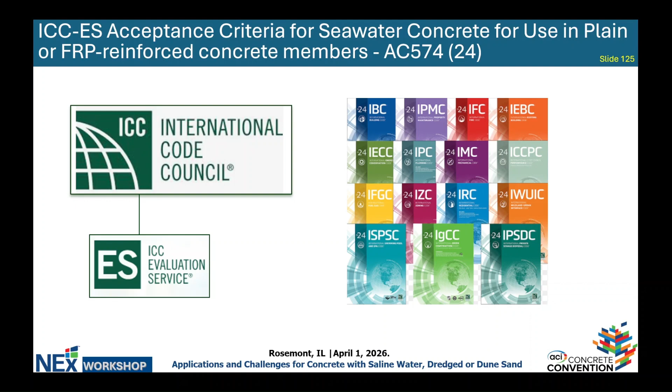So ICC-ES is actually a subsidiary of the International Code Council. The International Code Council does the IBC and the IRC. And in the IBC, there is section what was 104.11, but now in the 2024 IBC and later editions, it's 104.2.3. Doesn't roll off the tongue as well. But it is the section that allows you to use alternative materials, design, and methods of construction and equipment.

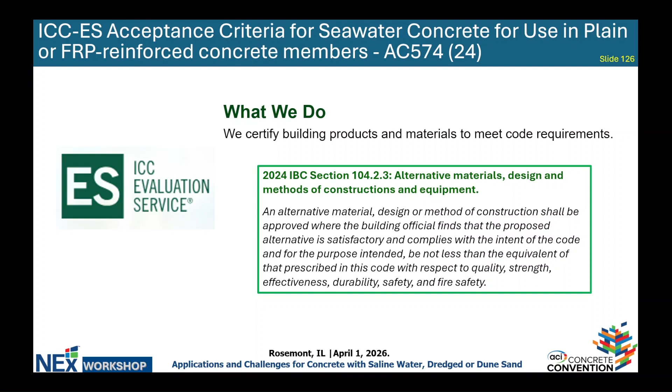And so our role at Evaluation Service at ES is that we certify these building products to ensure that they comply with the intent of the code and with respect to quality, strength, effectiveness, durability, safety, and fire safety. So since seawater concrete is not recognized in ACI 318, which is referenced by Chapter 19 of the IBC, therefore it falls within this category of alternative materials.

So I just wanted to first talk about our acceptance criteria process. Our acceptance criteria process actually starts with the collaboration between us, the staff members, and the report applicants, and any industry leaders that are interested in being part of that process. We develop a document, we think, what is the acceptance criteria for this material? And then after we draft it up, we post it on our website for public commenting. Anyone can come, read the document, post their comments, and then we address each of the comments.

And then eventually that document comes down to an evaluation committee hearing. This evaluation committee hearing happens 3 times a year, February, June, and November. And the process before each hearing starts about 6 months before the hearing. So if you have an alternative material like seawater, you have a project, you need an evaluation report, certification on it in 2 months, but we don't have an acceptance criteria, you're going to have to wait a bit. So this is why it's good to get ahead of the curve before you start doing any projects to make sure there is some type of criteria that you can get certification for before you start your project.

And the evaluation committee hearing is made up of building officials, engineers across the U.S. And at the hearing, you present the acceptance criteria, and then proponents and opponents can present their comments on it. And eventually, there's a decision, acceptance or acceptance with some changes, or come back and make some changes later. Okay. So that was the process for the seawater concrete.

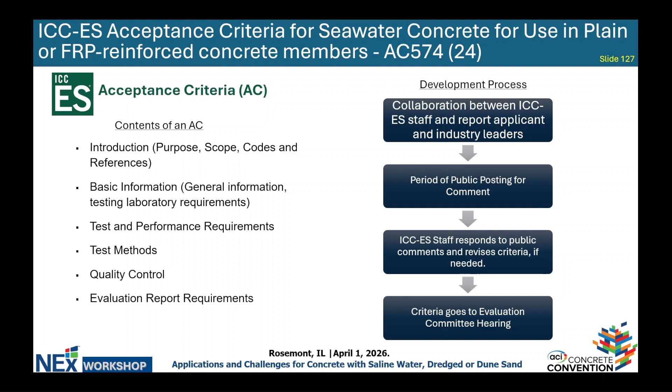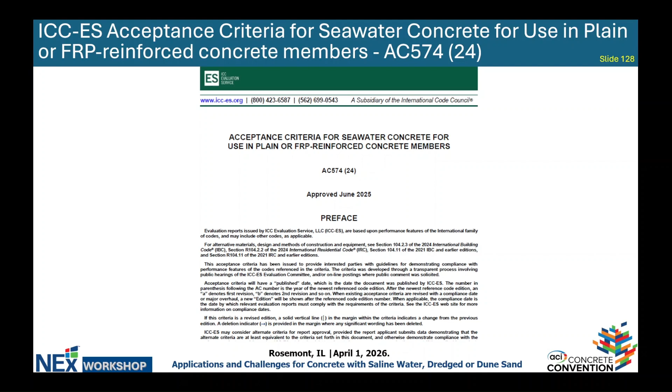Okay, so this is the title page of it. So the actual title is Acceptance Criteria for Seawater Concrete, Use in Plain or FRP Reinforced Concrete Members. And each of our ACs get a number. This is AC574. The parentheses of 24 just indicates that it is up to the 2024 IBC code.

All right, so for the introduction of the acceptance criteria, we start with the purpose. The purpose of this acceptance criteria is to establish the requirements for the evaluation of concrete made with seawater. And so you can have reports, what we call ICC-ES ESRs, evaluation service reports, to be evaluated under the following codes. So not just the IBC and the IRC, but we're also considering the Dubai Building Code, the DBC, as well as the Saudi Building Code, the SBC. And the reason we developed this is because concrete made with seawater is not code compliant concrete.

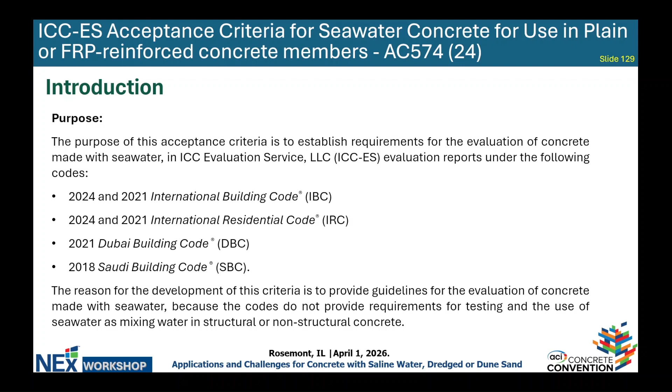Okay, and the scope considers seawater as a mixing water for the production of hydraulic cement concrete, and it can be used for plain concrete or fiber reinforced polymer, FRP reinforced concrete. And this is seawater in replace of the code specified ASTM C1602 potable mixing water. And due to the seawater content, any conventional steel bars or steel anchorage inserts, anything with steel, is outside the scope of this acceptance criteria.

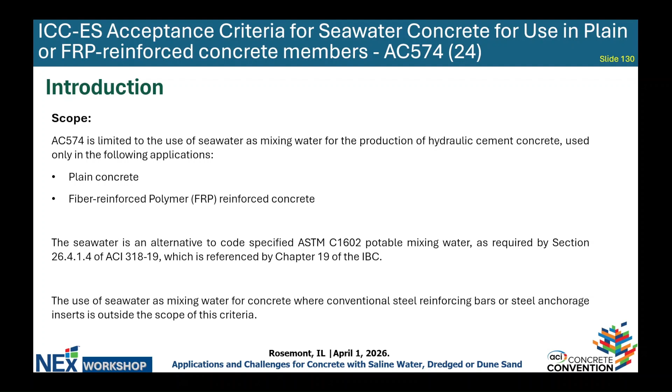So before we get started into all the testing requirements, I want to define some notable definitions in the acceptance criteria, starting with the major environmental event. Obviously, the sea can change over time due to different things that are happening. And so we define a major environmental event as something that can affect the chemical composition of the seawater source. So this is things like hurricanes or oil spills, or maybe a river mouth is near the seawater source and there's some flooding.

Okay. And then here we have to define what seawater concrete is. It's very specific. It's concrete made with seawater. And then we also allow for seawater curing. So since fresh water is scarce, it makes sense to cure your samples also with the seawater. And we had some debate about how do we define the seawater source, and so this is the definition we came up with. It is the combination of onshore location of the facility used to collect the seawater and the distance of the inlet collecting seawater from the shoreline.

And a couple of other definitions. The reference sample is the concrete made with that potable water that's in accordance with ASTM C1602, as well as the property ratio. Property meaning compressive strength, flexural strength, length change, and time of setting.

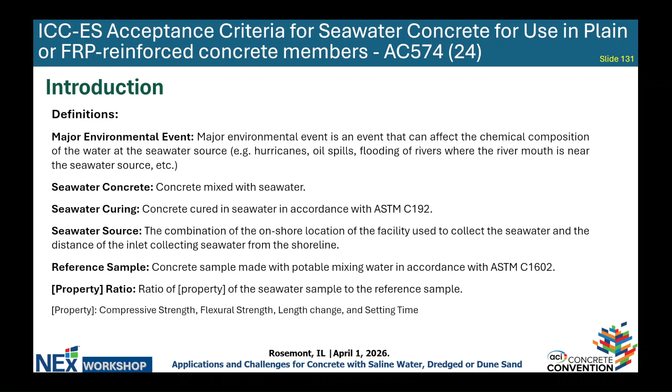Okay, some important information about packaging, identification, and where you can do your testing. So there needs to be a description of the method of seawater source on the labeling, such as the transportation truck bill. Also, with all our ESRs, the labeling must have our ESR number on it. So that's just to show that it's been certified by ICC-ES.

The testing lab has to comply with ISO 17025, and the lab has to be not just accredited to ISO 17025, but it has to be accredited for those ASTM standards. Now, we do have an acceptance criteria on test reports, AC85, where there is a section 2.2, where if you've done testing at a non-accredited laboratory, we have a process where we could do a one-time accreditation, or you can justify your testing, because graduate students, for example, doing a lot of testing in the university labs, have the knowledge to test in accordance to these ASTM standards.

Test reports must be in accordance with section 7.8 of ISO 17025, and the sampling. So again, this is from AC85. We have two options for sampling, either mandatory sampling, meaning that the accredited lab comes to your manufacturing location, takes the samples or witnesses you taking the samples and brings them back to the lab to test, or we have optional. And so we're allowing optional sampling. If you don't have the accredited lab sample your product, then you have to write a declaration declaring that the product that was tested is equivalent to the product that's being manufactured.

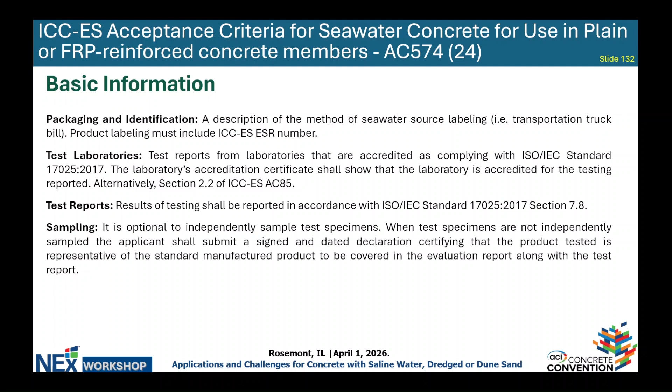Okay, we allow all different types of cement, not all different types, but we allow these following cements. The cements that comply with section 26.4.1.1A of ACI 318-19, as referenced by chapter 19 of the IBC. We're still using the 19 of 318 just because the 2024 IBC only references the 19. And once the 27 IBC comes out, we'll reference the 25 ACI 318. You can also have an evaluation report under AC459, which is our acceptance criteria for proprietary hydraulic cement, as well as AC529, which is our acceptance criteria for low carbon alternative cements for use in concrete.

The FRP bars, so for structural purposes, they either comply with 7957 and 440.11, or they can comply with D8505. They also can have an ESR with us, so AC454. And for non-structural purposes, they can have an ESR with us under our AC521, which is our acceptance criteria for FRP bars and meshes for non-structural concrete members.

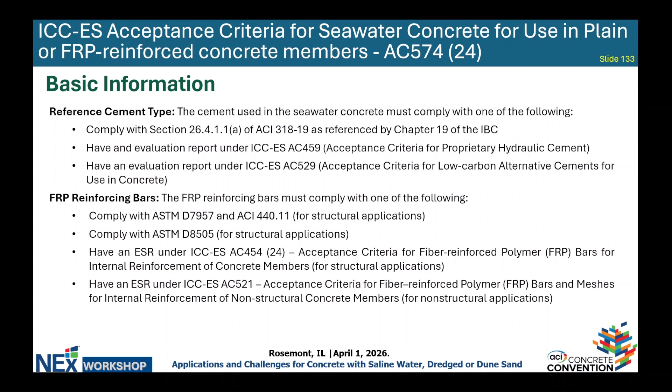Aggregates. At this time, for normal weight concrete, we're just requiring ASTM C33, and for lightweight concrete, ASTM C330. The water to cement ratio has to be prepared at the maximum water cement ratio between 0.45 and 0.5. And we actually allow the fly ash limits that are given in section 26.4.2.2B1 of ACI 318-19 to be exceeded when the physical properties of concrete requirements of AC574 are met.

So that is basically section 3.2, which is on standard curing of the samples. We also want to know if the seawater is being treated. So any seawater treatment used by the manufacturer shall be used in the samples tested and reported in the evaluation report.

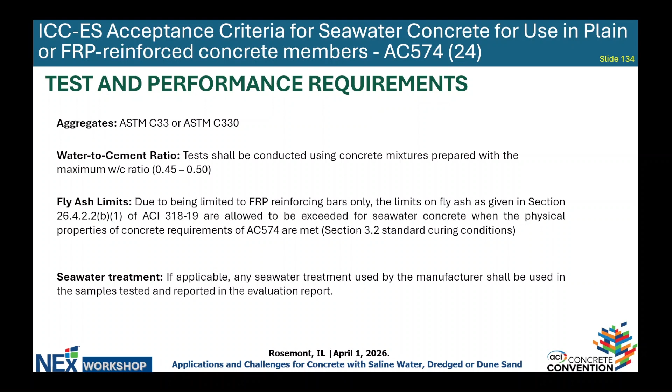Okay, so the first testing requirement is the chemical composition of the seawater. And so to test the chemical composition of the seawater, we are requiring the following standards. So for the chloride sulfate content, ASTM D4327. For the sodium, magnesium, calcium, potassium, and other alkalis, ASTM D1976. The total dissolved solids is D5907, and then the pH can be measured either with D1293 or D5464.

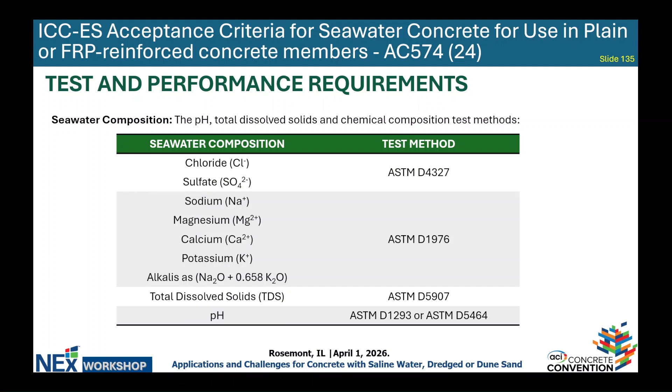The seawater chemical composition is really important. It's in your quality control, and so this is to be reported on the ESR. So next up is our fresh properties. So we're requiring slump, fresh density, air content, initial and final time of setting, as well as bleeding. The number of specimens per mix design should be 3, 1 per batch.

And these are our acceptance criteria. So for slump, it's within 1 inch of the reference mixture. For fresh density, within 5% of the reference mixture. For air content, within 1% of the reference mixture. For time of setting, not 1 hour earlier or not 1 hour, 30 minutes later. And then bleeding is max 2% over the reference sample.

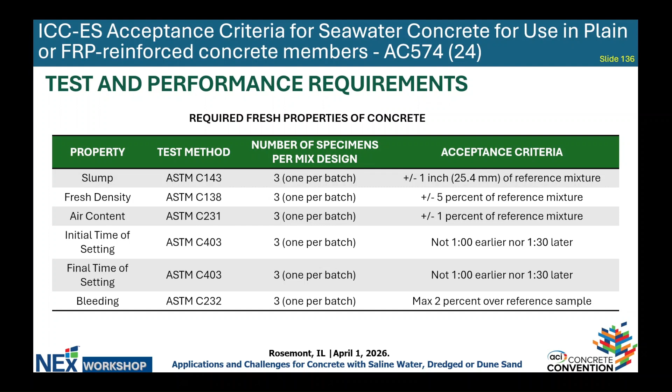Next is our hardened properties. And so you can cure the specimens in potable water or seawater. So we have 2 options for this. This slide is a little cut off, but anyway, I'll just point out. So there's some footnotes on this testing matrix.

For compressive strength, we are requiring testing at 3, 7, 28, and 90 days, as well as 6 months and 1 year. So we want to ensure that within the first year of the seawater that there is no detriment to the compressive strength. And the acceptance criteria would be minimum of 90% of the reference sample. For flexural strength, we only are requiring 3, 7, and 28 days, but the same acceptance criteria as the compressive strength.

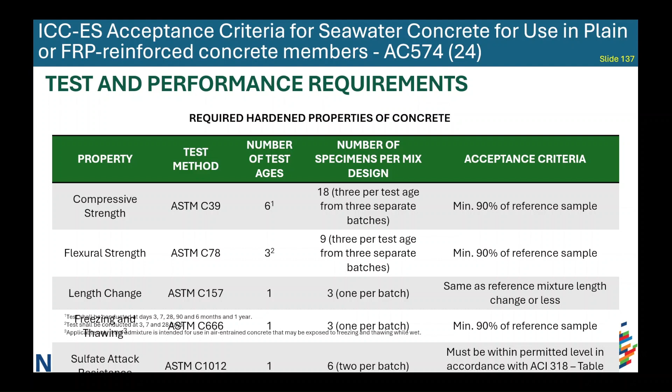We also look at, it's hard to read, but length change, freeze thaw, but only if you're in a region where you are required for freeze thaw, sulfate attack, and I think that's it. Oh yeah, ASR. Okay, so since this is for both IBC, IRC, but also the DBC and SBC, we allow some alternative standards to be used for some of the fresh and hardened properties. But if you do use these standards, they must be referenced in the evaluation report.

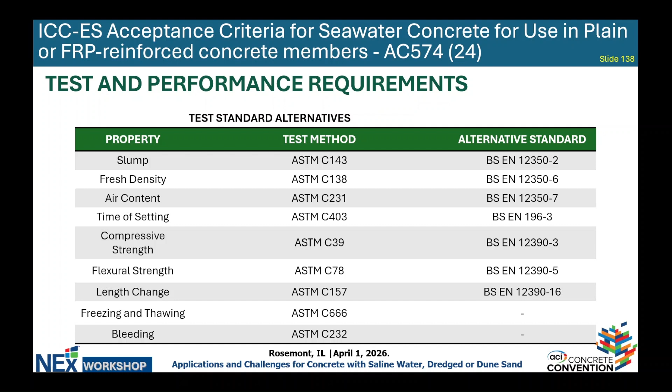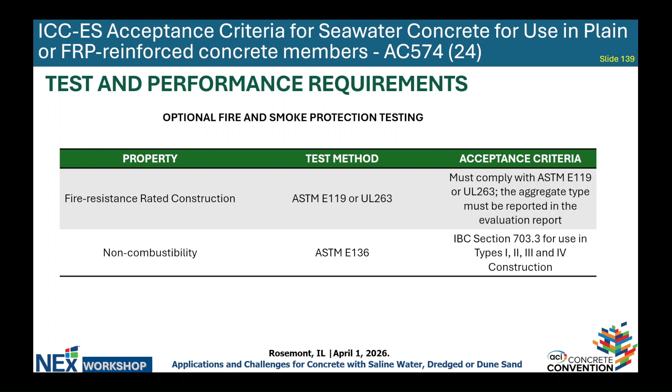We also give you optional, since this is not code compliant concrete, if you are wanting fire performance for fire rated construction and non-combustibility, we give you those options as well. And then for your quality control as well. So with the initial report, you do an initial qualifying inspection of the manufacturing location, and then we require surveillance inspection every year. The Seawater Quality Control Program, so the composition must be tested monthly and after every major environmental event. And then the seawater must have no foreign impurities within 5 times magnification.

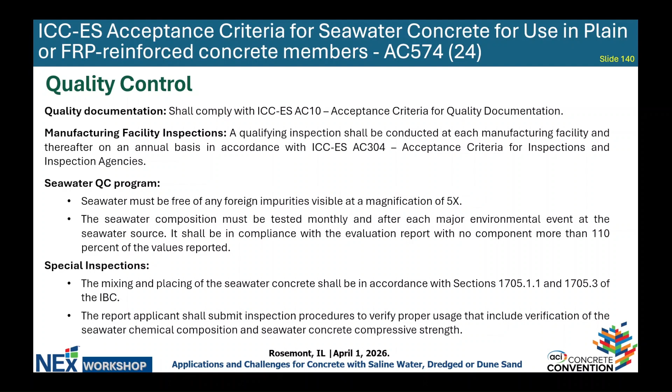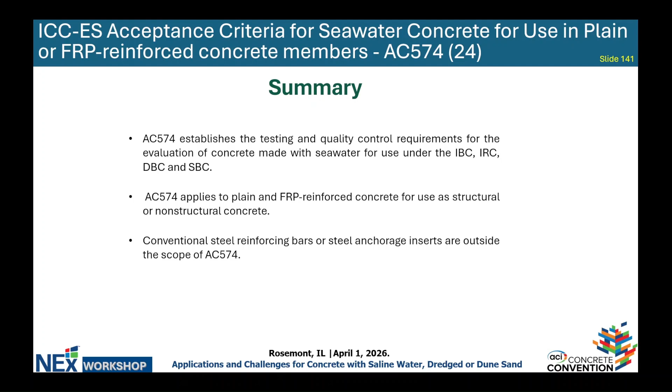Mixing and placing of the concrete should be in accordance with 1705.1.1 and 1705.3 of the IBC. But if there's any special instructions from the producer, that should also be given. And this is my summary slide. So AC574 is the first way for developing certification for these seawater concrete mixes. And it's certification for compliance with the IBC, IRC, DBC, and SBC. It only applies to FRP reinforcement; steel reinforcement is outside the scope of this.